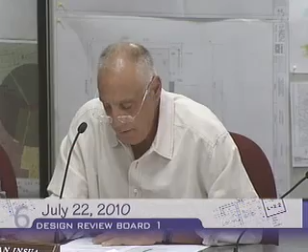At this point in time, I'd like to turn the meeting over to Chairman Insua. Good afternoon, everybody. Why don't we start with the first project, which is case number 1, PDR 2010-023-A. The address is 3752 Fifth Avenue. And why don't we have our staff presentation of the project?

Thank you, Mr. Chair. Good evening, board members. As you mentioned, the case number for the first case is 1 PDR 2010-023A, located at 3752 Fifth Avenue. The proposal is to legalize a 186 square foot addition to an existing 835 square foot house. Of that 186 square foot addition, 171 is to the front, which is an enclosure of the front porch, and 14 square foot is a bathroom expansion at the rear. Currently there's an 835 square foot house on the site. The lot is 3,750 square feet, and the house was built in 1947 in the R12 zone.

There is a setback and standards variance granted to this project on January 27 of 2010, which allowed for the addition to take place in the front setback while maintaining the existing one-car garage and the existing substandard landscape area, which is less than 40%. There are no environmental constraints. The historic preservation planner has reviewed this project and has found that this is not a potential historic resource.

There are actually a set of photographs posted behind you and another set, which there you have it. In those photos, these are the only evidence we have of the original house when it was built, what it used to look like, and then you can also see the house after it was added to. Obviously, you can see the addition is not finished, it's not completed.

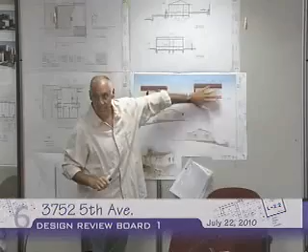The drawings that they're proposing, okay, right here. So when they finish this process, their hope is that the home will look like this from what they have today, which is construction in progress. Okay, as a concerned neighbor, I like that, if that helps.

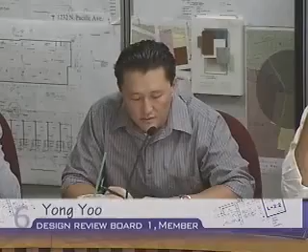I think whenever we're dealing with a project where we're looking at it after the fact, I guess we have to look at it for what it is, but also keeping in mind that we have to keep the same standards that we have throughout the other projects, and so there has to be a consistency throughout. So I think if this project would come to us without having gone through the construction process, there's a lot of things that we would not be agreeing with, and so I think that's the way we have to approach it.

Looking at the pictures, it actually is kind of strange because since it's already built to that length and there's a picture of it, you get a very good sense for what it actually is, and you don't need a 3D image to tell you what it's going to be. And it actually does come to the street quite a bit, and it becomes a huge face at the top of it, especially since it's elevated.

I'd like to see some breakup of that plane. I think it's just too massive as it comes towards the street. The porch was a way of sort of a transition into the house. Now that's gone. Maybe larger overhangs would help. I know that there's some code issues there.

Windows, definitely. The new elevations that you're showing is more appropriate, I think, for what you want to do, instead of those tiny off-the-shelf Home Depot windows that are there now.

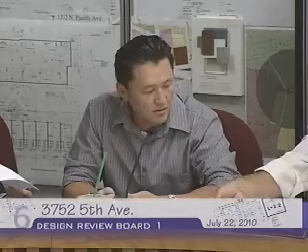But I think there's a lot of work to be done still, and I would like to see it improved. And I think that roof, cutting back the angle on that, it's very strange, and I don't think we would approve that as a new design, I guess, or a modified design. So I'll leave it at that for now.

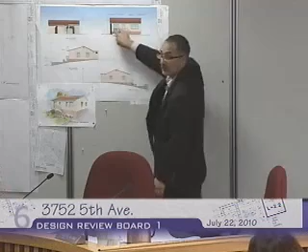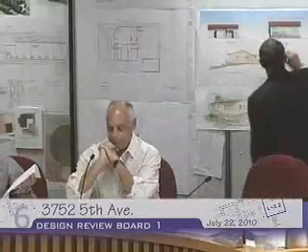My thought was, because this is fairly flush right now - I mean it is flat - once you push that in, and take advantage of the full width of that opening, even if necessary you might take that wall here and move it over a bit. This one is a little harder because you already have the bathroom in there. And actually, you see a little bit of that. You could move this wall a little bit, and create this sort of recess for the door, but you could also break the eave line. You could do a couple of things.

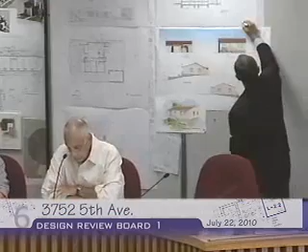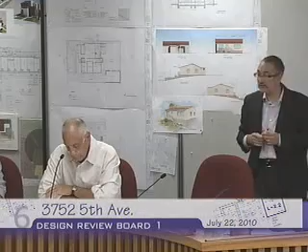You could create a little - the roof over the door could actually flip up, and now - yeah, the eave here, this is your current eave - you could actually get another eave here, and this becomes your door. But now you can start introducing some timber, maybe some corbels of some sort. You could even put a little clerestory window right in plane with the door, so that now you're creating a really nice entry. That breaks up the monotony, just to give back a little bit of detail, because right now the only detail you really have is this.

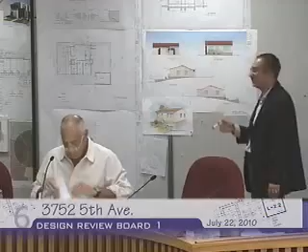I think you've improved what's there quite a bit, but we're just saying maybe we need to do a little more. And I suggested maybe dealing with the corner. What if - and it's probably hard, again this is one of those situations where it's already built. If this wasn't built, we could easily say do this and do that and be done with it. But now we have to deal with the fact that it's built, which isn't fair to the board. If it's possible to even get this corner in, just like down the other side, and create maybe a planting area at the corner or something to kind of relieve that corner a little bit.

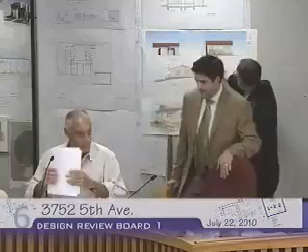But definitely I would pursue that - it can't be done because of the door. The other side isn't done either, so right now it's extended all the way out. I didn't notice that, I'm just going by the plan. It goes all the way to the back. It will be pushed back based on - right now it's built to the conditions of the same variance, right? Yeah, but they could actually do the same thing here if they wanted - it kind of chops it up another way.

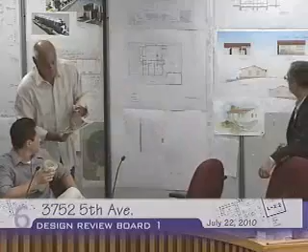Interesting thing, and staff maybe can help us, is that with these plans, this addition that's been currently built has been built to the corner right here. Yes. And now they're going to have to demolish that because it's encroaching. So there's a lot of work that's going to happen, unfortunately.

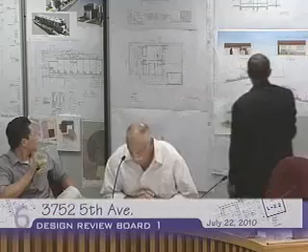If they did the same on this corner, couldn't they just wrap a corner window here? Now you have a roof that wraps around, you create some shadows, you have a planting area there of some sort. There's things that they could do still, but I would definitely pursue the door. I really like that idea. Because then you're creating a little more scale with the door and the facade rather than just one plane and one eave.

Very good. Yes, Ms. Wright. Staff was also encouraged by the larger windows, but then when we were reviewing the project and wrote the report, we thought the board might want to consider, rather than one large window as seen on the elevation on the right-hand side, perhaps a series of smaller windows that might be more in keeping with that residential style. We just wanted to point that out and include it in the report as something you want to consider. Thank you. Yeah, absolutely, we should investigate that. The window itself is big, but it's a little dull because there's not enough.

How do you guys feel about the articulation, the slider that's on the left side? It's trying to match. Right, it doesn't have the slider. It gives us sort of a backyardish kind of look to it.

Okay, well, yes, Ms. Palmer. You might want to also consider that retaining wall in the front, since it's going to make the house look taller as you look at it. There are several little stone houses on that particular street, and that area is conducive to utilizing the La Crescenta stone. You might consider doing that just on that front retainer too. The one in front of the steps right now is block.

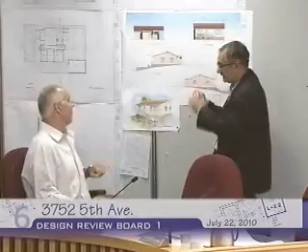This looks really odd, on the other side. Over here, sorry, it's over here. Yeah, it's right. And you would have a line there, and you don't have that.

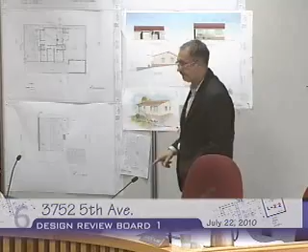What's built is actually different than this. And would you like to make that lower? Yeah, so what's built, I think, is right here. Just as it's conditioned on the other side to be pushed in, would you like that to be conditioned that...

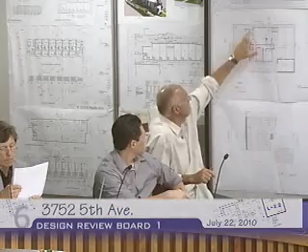Well, I was going to speak to that. If you notice, they've created a bedroom in this area that's already small. And aside from the tearing out and rebuilding, if you notice, if we push it back, similar to this notch right there, it really affects the usability of that bedroom significantly.

They could put a closet. If they put a notch, they could make a closet out of this wall, and now your room is regular again. Well, the interesting thing is that they're calling this a bedroom, and they're calling this a bedroom, but there's no closet. Which means that it's not a bedroom.

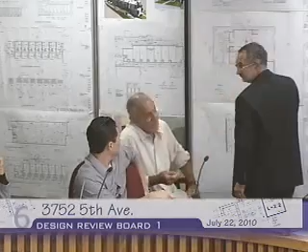Right, but once you notch it, you could put a storage closet in there, and you could put another one right in here. And again, we're doing design review on the outside. Apparently the proportions are really...

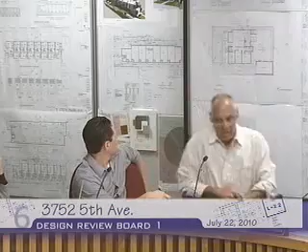Okay, well would you want that to be a condition or a consideration? I think it should be a consideration, and I think staff should make a judgment on whether it works architecturally. Condition? Well, it's your call.

But what if it doesn't work architecturally? I mean, we have to see it. We're trying to avoid that. I mean, if you notch that and then it doesn't work from the exterior...

Okay, well, what we want to do, I mean, we want to be able to provide specific information, especially with something that's already been built. I think that's going to be super helpful.

The only thing I think we should say is the paint, and that should be a consideration because it's paint, and we don't get into paint, but it'll help this house. I believe that in this house, since it's already built, specific things that we want done is going to be helpful. I bet probably for staff and even the applicant, knowing that that's what they've got to do.

So we're here, we'll support. We'll listen if you want it, and we'll see if we can vote on it.

Now the other side is conditioned. That's because it's in the setback. So let's do it. It has a condition where we would want the setback to have a little nook in there. So we're currently at a 2 foot notch on both sides.

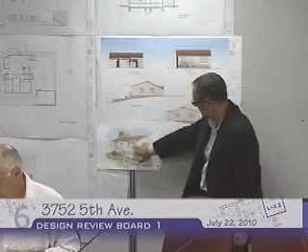I would think, at least for these right here - there's only two more here - it'd be nice for all of them to be the same. And if you're going to do two windows next to each other, it'd be nice to have double hung, that way you get a nice rhythm.

And I would do the same for the bedrooms, provided those are wide enough to meet the minimum egress for fire escape. So you're saying any window visible from the street should be... I would say this corner, the other side there really aren't any until you get to the back. So the front windows and the windows on the driveway.

East elevation - I think there's actually two on the other side, on the west elevation as well. But the new one would be a third one, right? Right. So you're saying windows on the south, east, and west elevations be changed to fiberglass, double hung. I think that would make this a lot better. I'll add that as a condition.

Okay, those are all conditions. I just have a question. They've called out roofing, new roofing, on there. I don't know if it's existing new roofing or proposed new roofing, but the back portion - you've got two flat roofs. I don't know if those are going to be rolled roofing or shingles. One shows shingles and one shows nothing, so I just think they ought to at least blend and be consistent, being both flat roofs.

So when they install the new roofing - what I see in the note says new roofing to match existing. So that would propose... in the flat area, you can't put shingles on a flat roof. Right, so whatever the material is, it needs to blend and match in the flat area. Yeah, okay.

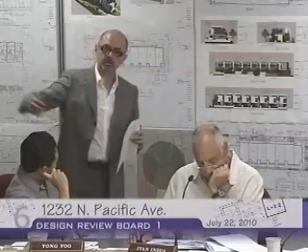The way we came about this is essentially, I didn't want to create this long linear look. One of the options we looked at with staff was whether we wanted to break this repetitiveness by flipping them, maybe a couple facing each other and a couple not. It just didn't look right.

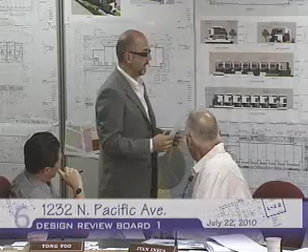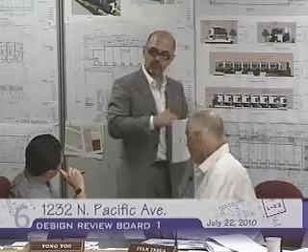So what I've done is the materials represent volumes and spaces that I wanted to create. I like to create boundaries of spaces without really enclosing them with materials. So it's elements of mass with a void, a mass with each one of these little volumes and fenestrations, or juxtaposition of the volume on the facade, I wanted to create with different materials.

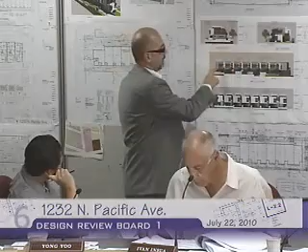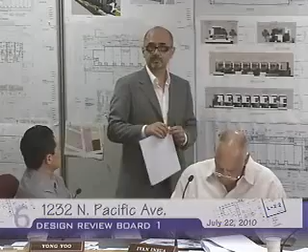The warmer color, we tried to use as much wood as we could towards the north, and the cladding was actually the metal roofing. Creating this type of mass on this side, I thought it would be a lot more massive facing the north side, facing the residential. So I wanted to create less of a volume looking towards the commercial side.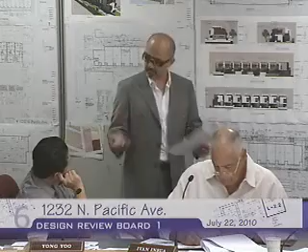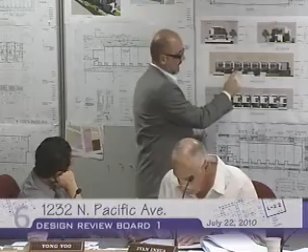So all these different materials came about, and no material really comes together in different planes that match the same — that's another thing I wanted to use. If I have wood with a volume, I didn't want to put another volume of wood that's a different volume; I wanted that separated by wood, glass, plaster, then plaster, glass, wood. So if we have plaster, glass, wood in one plane, even in a different plane I didn't want to start again with wood, glass, plaster. It's just avoiding repetitiveness of materials — it's pure taste, and that's the bottom line.

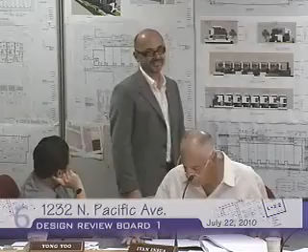Very good. Any other questions for him while he's up here? Thank you, sir. Any questions for Mr. Malekian while he's here? Anything? Okay, we'll probably call you back. It's a good project.

I have no more speaker cards, but the city received 2 emails, and in one of them a gentleman indicated he would attend, but I don't think he attended. So if there are no more speakers, I'll close the open public session.

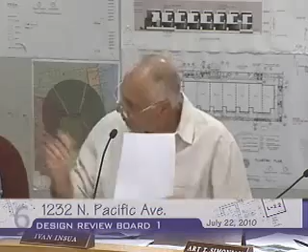Okay, why don't we start with you, Ms. Palmer? As usual, I think this architect comes with a very nice and interesting project. But I have a comment or concern on the south elevation with the reflection of the white plaster in these windows — there's going to be a lot of sun. These are bedrooms, I think, and there'll be a lot of heat coming in there.

Whereas on the north elevation, he's showing some canopies. So I'm wondering if there would be a way to cut down on that heat, because I think it's going to be a problem. I also have a few comments on the landscape.

I would want to make sure when you go through this plan again that you specify the varieties of some of the plants, like the nandinas and the rosemaries, because some are ground covers, some are tall, have the same name. You want to make this right, so I think you need to pay attention to that.

And maybe in the front where you have the crepe myrtle and the other tree, make the crepe myrtle a larger size, because I think it's going to be an 8-foot tree that's dwarfed if you don't increase that to a 36-inch box. And you've got a lot of crepe myrtles along the side.

With your color combination, they're called out as red, and I think that's going to be a clash, but you might want to consider white or some color that blends with it rather than stands out. The only other comment is that you've got irrigation around that oak tree — adjust it so you don't have the irrigation showing.

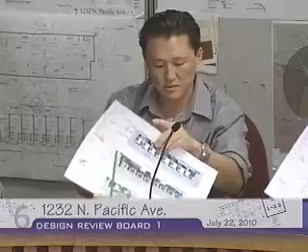I think I'd like to hear what you guys have to say, but I'm leaning towards doing the project with some changes to it. Okay, Mr. Simonian, why don't you jump in?

Well, I'd like to start off by congratulating the architect for what I believe is a job well done. It's refreshing to see well-designed, thought-out multifamily and commercial buildings come in front of our board. We just tend to see so much typical multifamily where it struggles to find a style, or if it does, it's not developed to the point of being intriguing, interesting, or even exemplary. This project, I could tell, has a lot of work behind it — you could tell somebody has sat there and designed it over and over again to come up with shapes and forms and common open spaces and entrances and light and air.

All these factors have been thought out, and the materials have been used in such a way that the mass and bulk of the building have just gone away. It's interesting to look at, and I enjoy talking about it because it really doesn't feel like a large multifamily project within the site. Although an 8-unit project isn't large to begin with, in this context—talking about Pacific with residential directly adjacent—the mass and bulk of a building becomes the main focal point. I believe the designer, architect, and firm have done a great job breaking up mass and bulk, and have come up with a good example here.

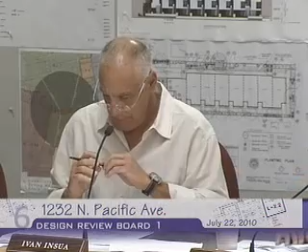Trying to gather my thoughts. Also, congratulations. I think the architectural assembly of forms, materials, space, volumes, both vertical and horizontal, how it sits on the site, how it relates to those elements of the site, are done very well. It's a good example of contemporary architecture. Sometimes people say modern or contemporary architecture is used as an excuse for lack of good design. This is a good design.

Interesting, because if this project wasn't designed as well as it is, I could not approve it. So often narrow, deep lots putting in 8, 7, 9 units rarely succeed, because a very narrow lot asking for overall architectural livability fails on the livability. So looking at the common areas, and how that affects the architecture, I don't think the common areas do it successfully.

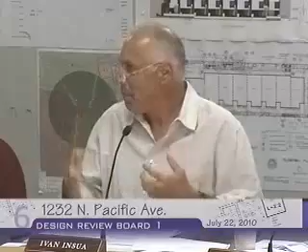But where this succeeds is that you can't look at the living style of this development and where it's located as a typical condominium or high-end apartment where people want backyards with patios. It's a contemporary urban commercial setting that's different. So those areas — common areas, walkways bisecting common areas behind someone's living area — I throw that out.

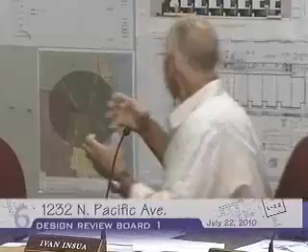Because the architecture and what it does for the site plan successfully achieves what the architecture is telling me. The landscape, the walls, the setting — I call it artscape, though the landscape architect might roll in their grave at that. When you look at these perspectives, the sites really become artscapes, and you can see the landscaping becoming something visual outside of where I'm living.

So don't give me a barbecue outside — I don't use them, I'm too cool for that. When I live here I don't need that, but I do want a grill inside — not architecture, but when I'm flipping my cool hamburgers with my wine, I'm doing it inside. This project does that so well. In its setting it wouldn't work as a pure residential setting, but it's right on that fringe between commercial and residential, almost inner city, and for that I think it does it well.

I can see myself walking down these walkways, which are art, and the lighting and landscape you're going to put there will be just as exciting as the architecture. So I throw out the thinking that we need a barbecue area, a kids' play area, and all that other stuff — not on this project. I love it.

I can see we're on the south windows — the sun is going to be beating down on those. So what?

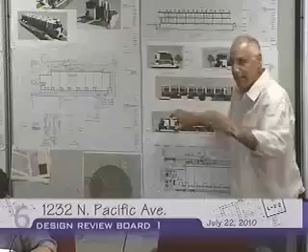Get high-performance glass. For me, putting in anything here is going to ruin that solid C that the architect talked about. It's that solid C, that form. Coming out in the horizontal section loses the integrity of that solid C. I would just say put high-performance glass in there, and you'll take care of the increased heat gain. I wouldn't want to do that, but if we as a board think that's important, so be it, because I love that hard C.

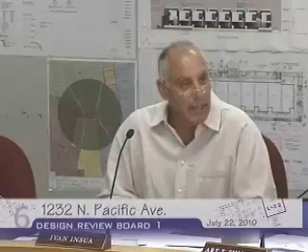I think we all feel that it's a good project. There may be some things we may want to comment on, but overall it's done well, especially in its setting. So I think it's a good project.

Do we have any more comments after we've heard everybody on the board and their thinking? Anything you want to add, Mr. Aliano? Anything else, given what you've heard, all our comments?

I'll just say I agree with you. I like that hard C, but I think it's so flush that it could be a problem. Maybe those windows were recessed a few inches or 6 inches, which creates a shadow line. It's not going to create shade, but at least a shadow line. You still maintain that C, and you get an added shadow. Excellent.

Okay, well, there's probably been a lot of comments. Have you been able to block in the comments that we have that would be more to alter the design? Why don't we hear some of the things you...

Right, I've got 3 comments. First, south elevation, large area of glazing can cause heat to the bedroom. A canopy can be considered, but then the last comment was that the windows on the south elevation can be recessed. I think I was saying just a consideration to address the heat problem. The designer can take care of that.

And the second comments were about the plants, such as rosemary and other ground cover, should be used. And with regards to the crepe myrtle tree, the consideration was to choose other colors rather than the red colors. I think what I said was just to look at the plant material and make sure the individual varieties of those plants are what they want to use, since one particular plant can come in different shapes and sizes, and it's not specified on the plan.

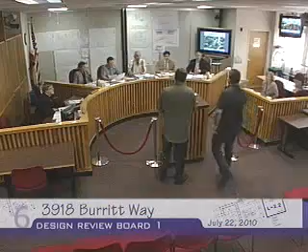Why don't you come up as well. Your name and address, please, sir. Nicholas Christopher. I'm the owner of the house.

There was a question, Ms. Palmer: you replaced the roof, or what? Replaced it, took the old shingles off. Actually the roof didn't have plywood sheeting on it, so plywood sheeting was put on, then metal. So our records are incorrect, it's replaced. Thank you.

But it was done without a permit. When the building department inspects the roof installation, they'll see whether the sheeting and nailing were done properly. Our focus would be whether we think the existing roof is appropriate aesthetically.

Any other questions for the applicants? Were you the owner while all this was happening?

Partially. Part of the addition was done in 1997. I bought the house in 2003, the one with the permit. So the one after with no permit is all you? Yep. And remember, the one with the permit was done but never finalized, it expired. Any questions for the applicant and/or owner?

Yes. Briefly talk about what process you went through as far as designing the structural members of that second floor addition. And forgive me.

It's one of the things I think we should focus on is the design. As architects, I know we're all gravely concerned about the assembly of the construction, especially since it was done without permits. But I think if we focus on the aesthetics, the building and engineering departments can handle those frightening questions for us as licensed architects and builders. So having said that, please feel comfortable.

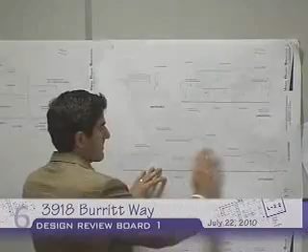Thank you. So when we would assess this facade in its entirety, the comments that would have been provided would be to break up this facade, break up this wall. There's just too much massing on the second floor. Create shadow lines, create some sort of differentiation between the second floor and the first floor. Those were things that would have been provided back to the applicant almost every time. That's just the way the overall structure of our boards are.

We try to minimize mass and bulk. And so when I look at this presentation, that's what pops out to me initially.

Secondly, with decks, we have projects that come in front of us that are deck proposals on their own. So someone has an existing house and they go through the trouble of bringing a project to us purely for a deck, nothing more but a deck. And this board will spend 45 minutes talking about the deck.

And we talk about its placement on the side. We talk about the massing that's created as a result of this new deck. We talk about how the neighbors will look up on the hillside and see a deck and how that would affect their view, and so forth. And at times we ask the deck to step down from the backyard, so you have a backyard area, and then the deck steps down where it's closer to the hillside and so forth, to reduce that bulk.

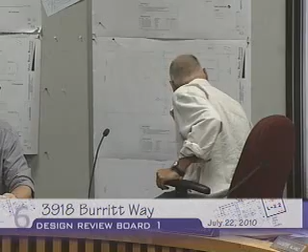The sheet 0.3 is actually not the first floor plan, but it's actually the second floor plan. And this would be down here, the second floor. I think we'll just treat this as if we were looking at it without being there again.

It's kind of weird. I mean, you did all this research for the roof and everything, and that's not even a big deal to me. It's sort of like it's just lipstick. It's cosmetic compared to the bigger issue at hand, which is we got a permit for 300 square feet, but then now we have this huge addition, and so it is what it is.

I guess I'm just a little stunned that you started the process and then said, why do I need to go through that? I got a hammer, I got nails, I'll just go for it. So it's just astounding to me, but it is what it is.

I think that the dormer definitely needs to get smaller, moved over, and centered on the window below it. The elevation on, I guess, the left elevation needs to be reworked. There needs to be some windows or some kind of breaking up of that two-story mass as it goes back.

Maybe even consider putting a window on the right elevation where the bedroom is upstairs. And I'll leave it at that.